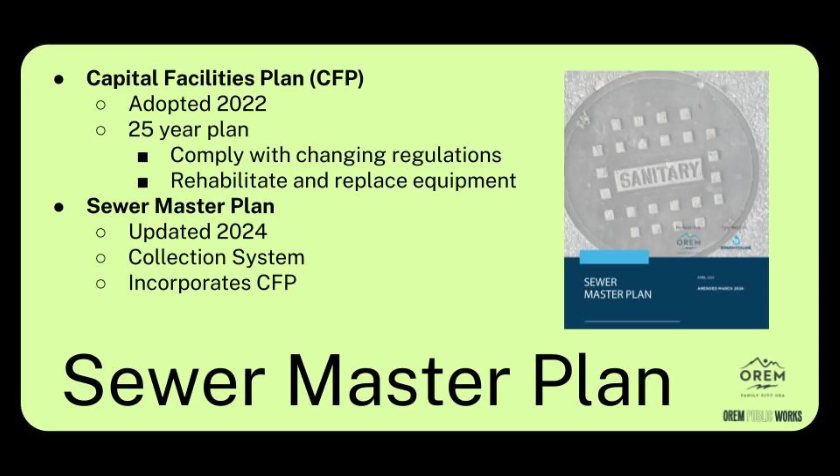Okay, so the sewer master plan was updated in March of 2024 for the collection system, and it also refers to the capital facilities plan. I've listed the first couple phases of the capital facilities plan here, with just a few highlighted on the screen, but there are more on the spreadsheets I've shared with you.

First of all, struvite mitigation. Struvite is a buildup of phosphorus in the pipes. There are certain processes that cause phosphorus to precipitate out, and it becomes problematic when your pipes get filled with a thick layer of solid material. So we need to...

We have worked on this project, and it's moving right along. It's been designed and is ready to go out to bid. We'll be using some federal funds we received to pay for this portion of the plan. Unfortunately, working with the EPA is a little slow, so despite it being ready to go, we can't move forward because we need to make sure we comply with everything the EPA requires.

We received this funding through, at the time, Representative Curtis's office, and we were pleased to receive that. Like 21 or 2 or so.

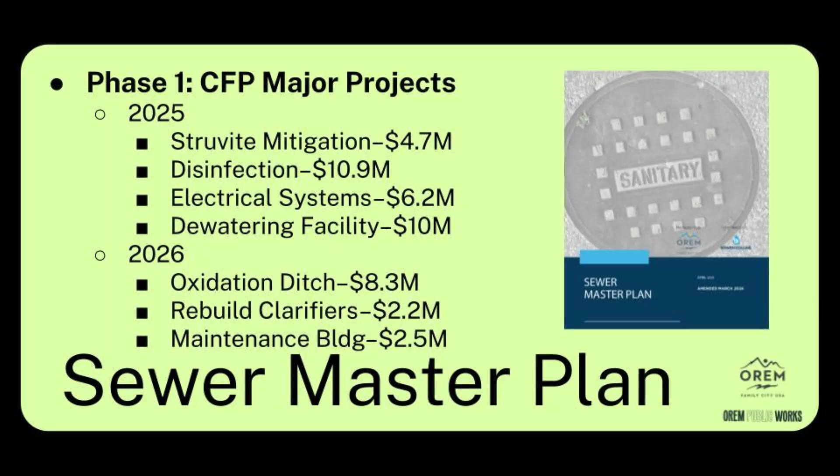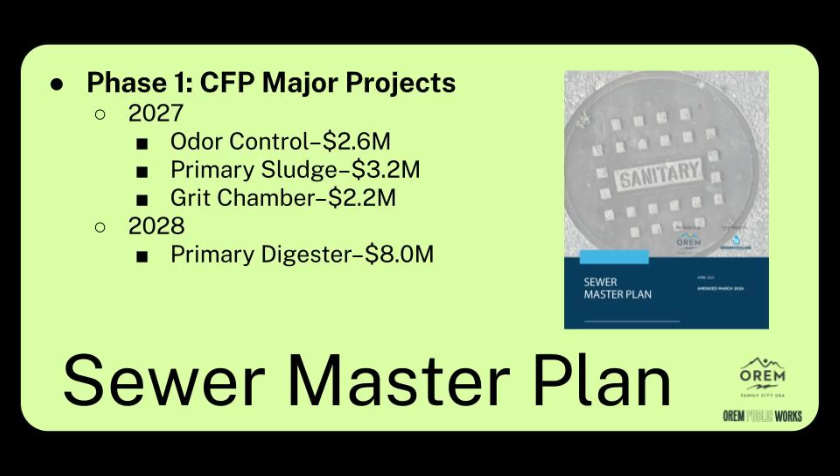2.2 million there. In 2028, primary digester upgrades, of $8 million. Then we move on to phase 2 - sludge thickening and electrical systems at 6.8, 7.4 million in 2030, and an upgrade to the headworks.

Now, Reed, are these projects all pay as you go, or are they? No, well, bonding - we'll get to that, you're jumping to the end of the program. Sorry. We'll be meeting with Lewis Young Robertson & Burningham today. They're doing the rate study, and they'll be recommending how we pay for these things. Bonding definitely has to be an option in order for us to do this number of projects this quickly.

And they would group these, so you'd have several bonds, right? Yes, right. Okay, and be four over the next 20 years? Yeah, when the capital facilities plan was completed back in 2022, it was a $160 million plan, broken up into $40 million bonds every 5 years or so. So Lewis Young Robertson & Burningham will say, all right, this is what you have to do in order to fund these projects.

And unlike other city payments, this is paid for by the users. That's correct, yeah - these are all utility fees. So the utility rates need to go up. It's not a tax, it's you use this, this is what it costs. We're all in this together. We're paying to make sure that we have clean water and a healthy environment around us. It's just what it costs.

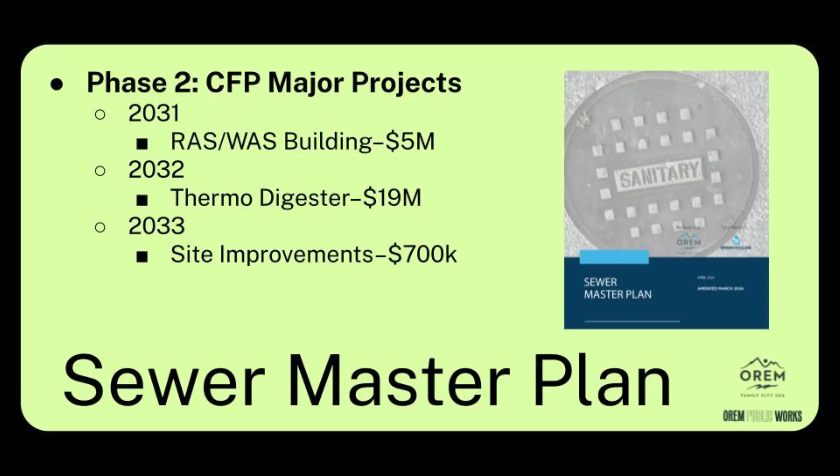Now, also part of the sewer plan is the collection system. We'll be investing $1.6 million per year in pipe lining, system replacement, where we'll be replacing pipes that are too far beyond the ability to line them, to preserve them. So we'll be doing $1.2 million per year there, and then maintenance projects of about $600,000.

So you said lining them, it's another 70 years, is that what you said? Uh-huh, that essentially doubles what you've got. And the cost per foot for lining versus replacing is significant - I don't know the number off the top of my head, but it's probably 20% of the cost. So you can do a lot more lining than replacing, and it's less impactful to the neighborhoods, as you're not ripping roads up and forcing them to park elsewhere.

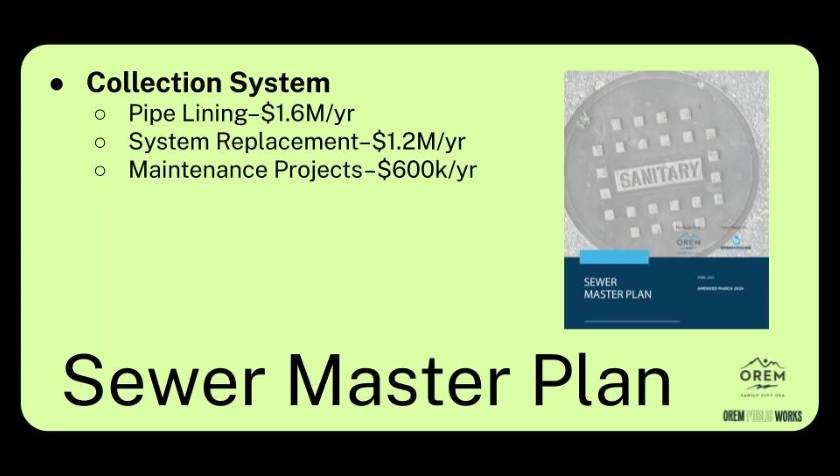Let's jump over to the stormwater master plan. The stormwater utility is charged with managing the stormwater as it comes. There's a series of pieces, detention basins and pipelines, that convey water that eventually makes its way down to Utah Lake or percolates into the ground and helps recharge the aquifer.

So we've got a series of projects. A keen eye of someone who's been on the Public Works Advisory Commission for a while will notice West Union Canal, we've talked about that in the past. Have we not done those projects? There's so many projects that have jumped in front of it for different reasons, many of which are UDOT projects.

You'll see here Lakeview Parkway, Geneva Road. With the growth we're experiencing in Southwest Orem, we've had to divert money from projects originally in the master plan to pay for these more urgent projects. The system's been working, so...

Our desire to get out of the West Union Canal is because there are some liability concerns there, and the company has so few users that eventually that company will die. The condition of the canal is such that it's very cost prohibitive to make it as safe as it should be. It functions, but we want to get out.

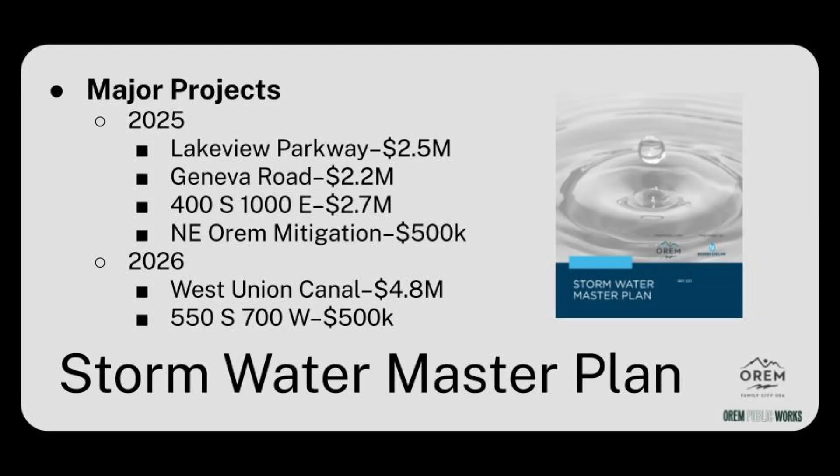Is 1600 North in conjunction with UDOT's widening? Let's see, no, so kind of. So 1600 North... oh, I wanted to mention real quick, you can see Northeast Orem mitigation this year. So we had the flooding, and we've identified some projects that we can do to help mitigate flooding in Northeast Orem.

So that deluge we got runs through that Dry Creek parking lot down into the area, and we're trying to mitigate all that with that $500,000. Hold on, go back - when is that going to be done? Our engineers are working on it right now, to come up with some solutions. That was mainly, well, 2 or 3 significant areas where we had flooding.

One of the areas was 1200 West, and the apartments at, what is it, 1420 North, 1200 West. Those apartments or condos made the news.

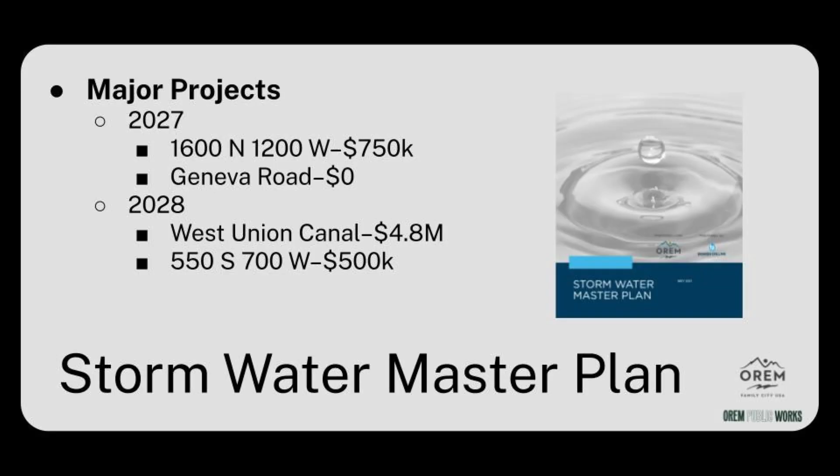Okay, slowly chipping away at it. All right, jump to the major projects of the Water Master Plan. Just tossing these up here so that you're reminded of them. We've got the well that was drilled

at 400 South and 400 West. It's drilled and capped. The tank is complete. It's been leak tested. They found there's some leaks that need to be repaired. They filled it full of water, and it's currently filled with water, and we'll be draining that so that they can fix the leaks. It's been backfilled.

If you've driven by it, is it done? It's not completely done, but it's 90%. It's probably 4 feet from the top. They get in there, yep. And so they'll be landscaping that this coming spring. It will continue to be closed to the public because the construction will continue to go on there, which is the 2025 projects.

So $18.7 million for the tank, and then it actually ended up costing more than that. Tank project piping, so that's where your area's neighborhood got blown up. Yep, still is, yep, that's true. We had to go back - 1200 West, no, 800 West and 800 South, still there. So we've got stormwater and drain pipe in there. We've got gravity line to feed water to the southwest area. Those are the two big projects that really blew up that neighborhood.

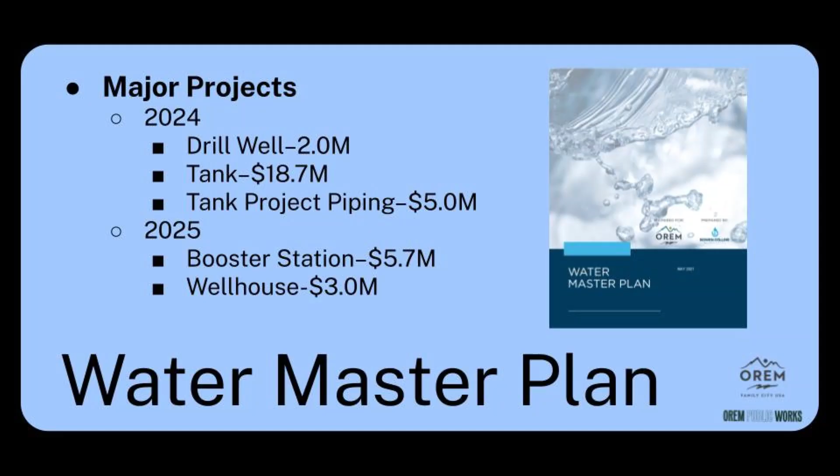We'll also have pipe replacement going on. We've got about $1 million each year for that. Booster station, that's wrong too. Yeah, I must have been, don't know what I was doing.

Aquifer recharge, we put $1.1 million in there for an aquifer recharge project that we're considering doing. We work with the North Utah Valley Aquifer Recharge Association - is that the name? North Utah County Groundwater Aquifer Recharge with Central Utah Water, Aquifer Council - so Central Utah is part of that. Aquifer recharge is taking clean water and putting it into the ground for storage, and then pulling it out later. So there's some areas in northeast Orem that could be ideal for aquifer recharge.

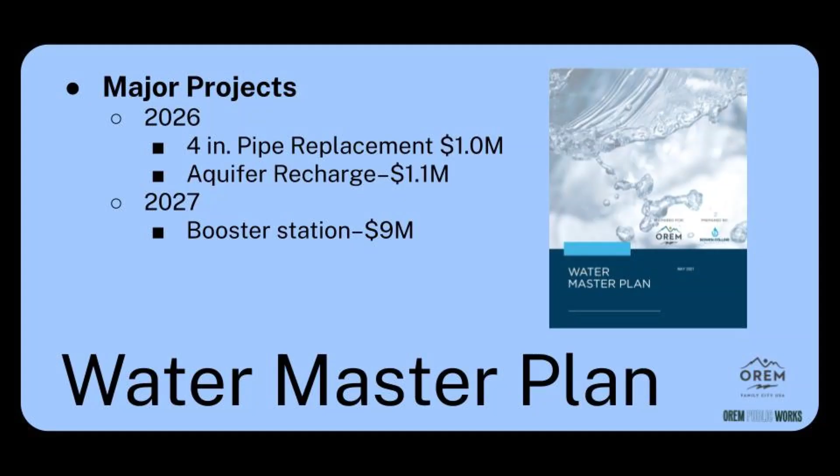2028, that's where we jump into well number 1 replacement. Well number 1 is in the Hillcrest area. It's one of our oldest wells, and it is the oldest - is it? I think it was. Yeah, it's called number 1. It was drilled in like the 50s, wasn't it? Was it '58 or so? Yeah, and it was re-drilled. It was drilled before that, and it was re-drilled right there by that. Probably farmland around there back then. It's interesting, if you ever drive by it, you won't even know it's there because it's underground.

And it's not the safest well house, if you will. Chlorine is heavier than air, oxygen, so it tends to settle, and it could be a problem for those operators there. We want to get that out of the ground. We want to relocate it altogether at another location by Hillcrest Park. We own that property, so it helps. Yes, yep. We have a new point of diversion that's established and approved by the state engineer at Hillcrest. Just a matter of us developing that location, that site. Then some piping improvements on 1600 North to increase capacity. You guys are looking at 1600 North too, so we'll continue to discuss that. More 4-inch pipe replacement, that's an ongoing project.

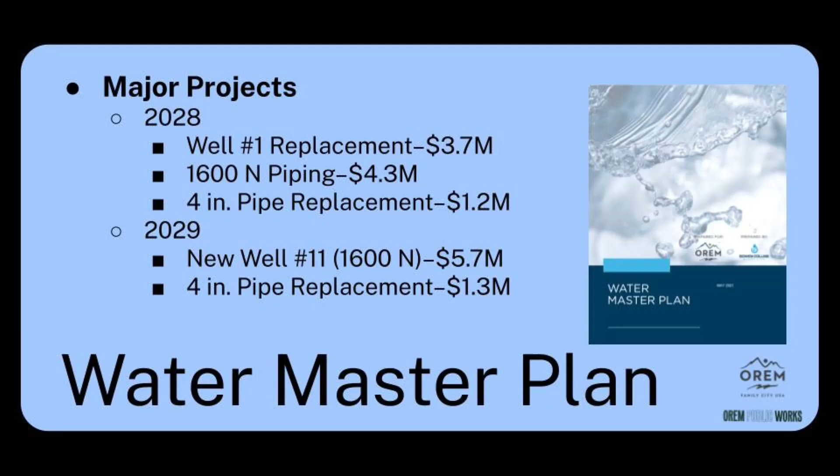More 4-inch pipe replacement. So now we're jumping to the next steps.

Is that the one where a property owner pushed back on you? 1600 North, I think you talked about that a couple months ago. They have the project done by the BYU students, the memorial. Yeah, that might be what you're thinking of. We're working together with that and developing some kind of smaller memorial. Is that the same location you're talking about? So there's enough room there to accommodate both.

We had hoped to have our financial consultant present here, but Chris and I realized we should probably review these projects with PWAC before we show them how we're going to pay for it.

So we will be finalizing the financial plan soon, and we'll have Fred Philpot with Lewis Young Robertson & Burningham come to our next meeting to show how we're going to pay for this, or the recommendations we'll make to the City Council on how to pay for this.

We've been fortunate that as we presented these plans to the City Council recently, they recognize the importance of this and have supported it in work sessions we've discussed. We're hopeful they'll continue to be supportive and work with city management to find the most palatable way to pay for these projects.